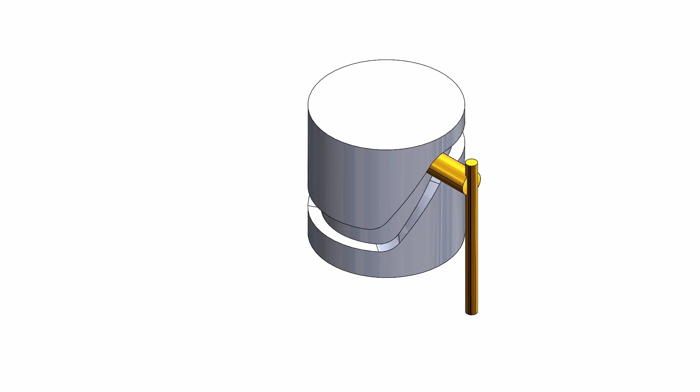Namaste guys, in this video we are going to learn how to make this cam mechanism in Solidworks.

So let's start. Go to the assembly, click on new part. Select the front plane, press Ctrl plus 8 to bring it into view. Click here, click on convert entities, and draw the convert entity as I'm showing.

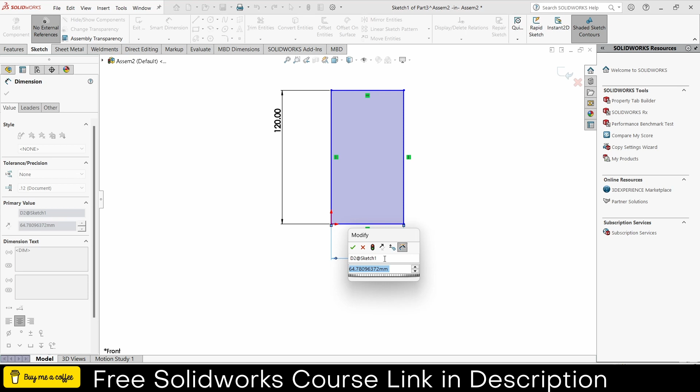Give it a height as per your requirement, 120, 40. Go to the features, revolve boss/base, select this line, click OK.

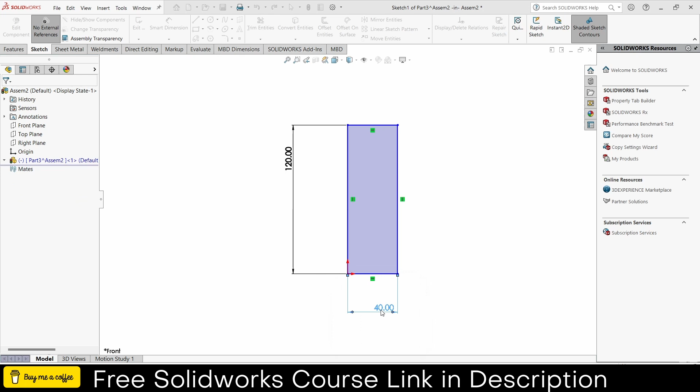Let's make it a little bit wider. Let's make it 60. Okay, this looks fine to me.

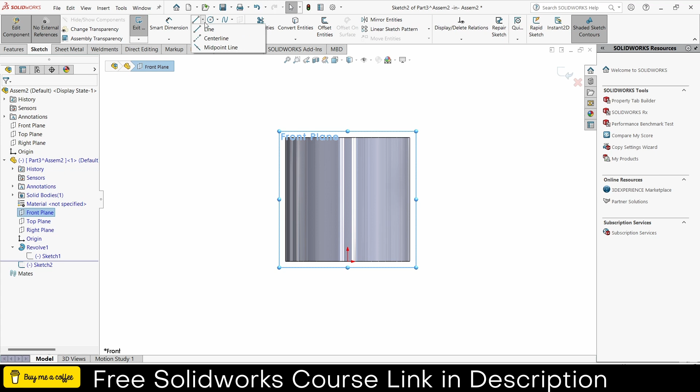Now after that, what I will do is select the front plane, click on sketch. I will draw a profile that basically cuts it out on this. So the first thing I have to do is go to center line and draw a center line.

So what will be its length? Its length will be 2 times pi into r. What is the value of r? 60. So this is what I got.

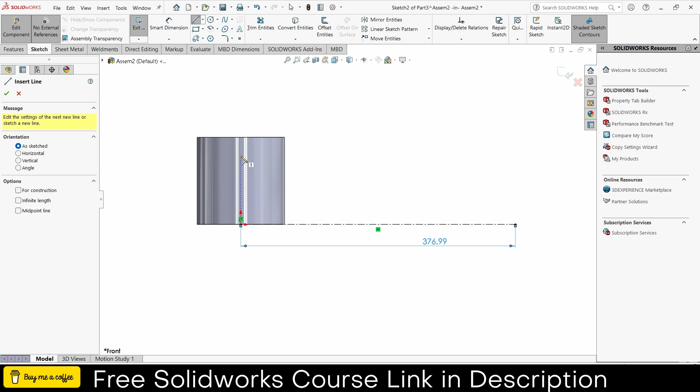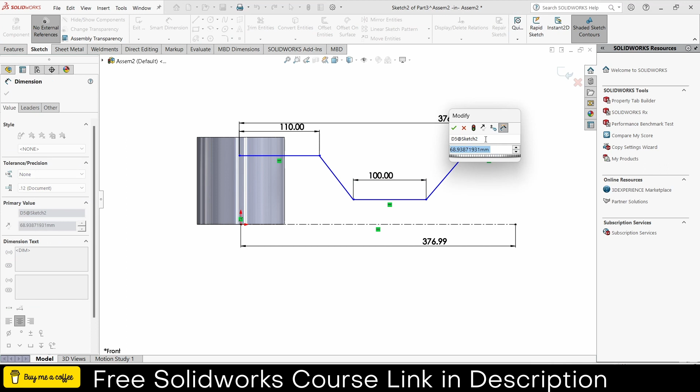Make sure that it has the same length as the below one, 376.99, and you can define these parameters as per your requirement: 110, 100, 70. Click OK.

Offset entities. Click base geometry, select the line. Bidirectional, cap ends, click on lines. Click OK.

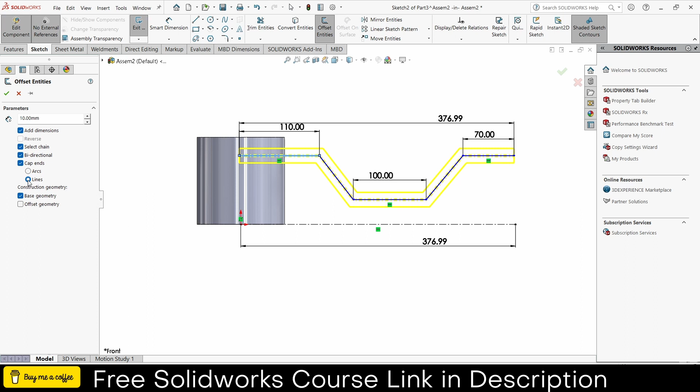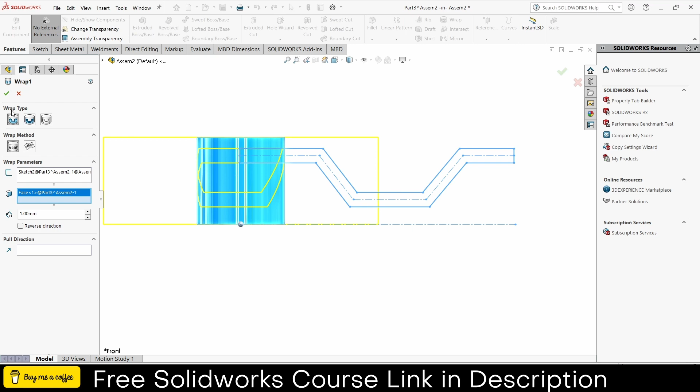Go to the features, exit the sketch mode. Click on the wrap command. Select the surface. Let's make it 10 mm.

Click OK. Currently it's moved outward, but I want it to be in the inward direction. So click here, click on reverse direction, and you can see different kinds of methods.

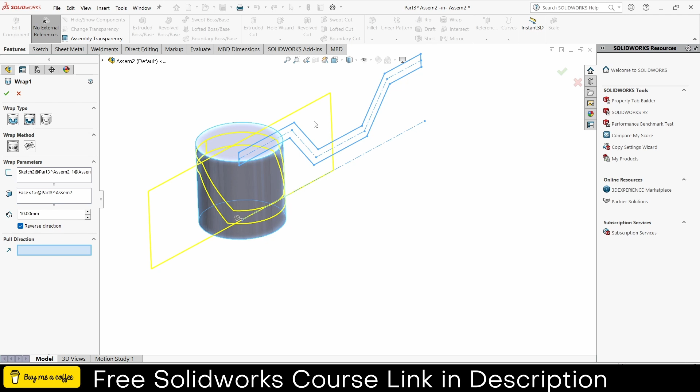So the first method is basically extrude out the material. The second is extrude cut. So click here, notice it's cut out. That is basically what I want.

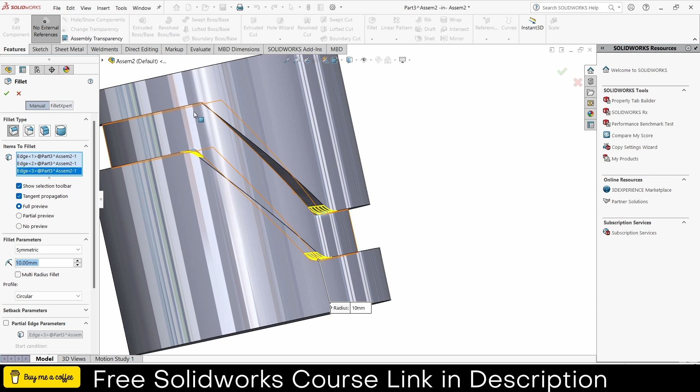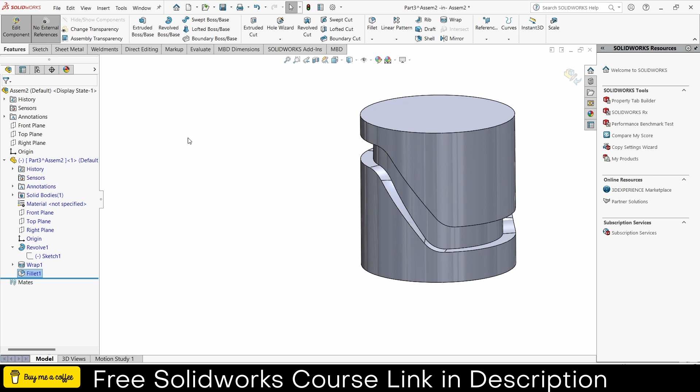Now what I can do is go to the fillet. I will add fillet here. Now I will draw a center line.

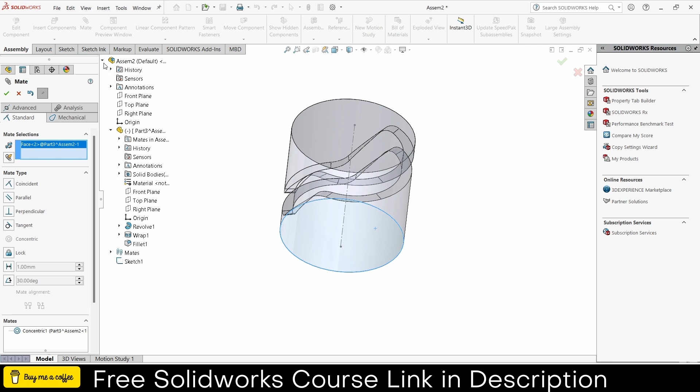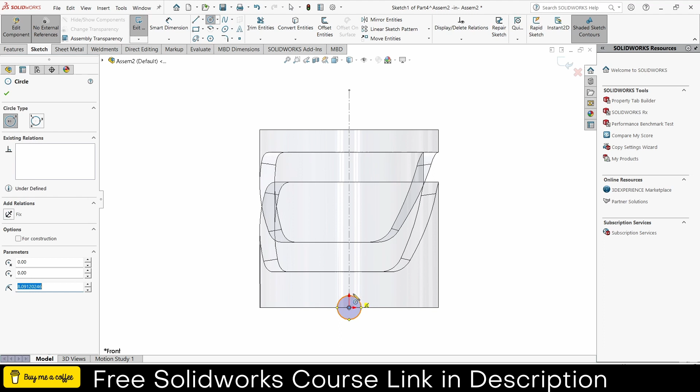Click here, new part, select the front plane. Make a circle of 9.5 mm. Extrude

up to 15 mm, or let's say 20 mm will be better. Click OK.

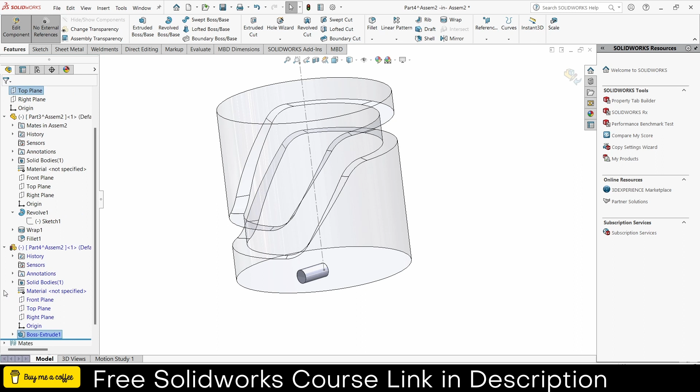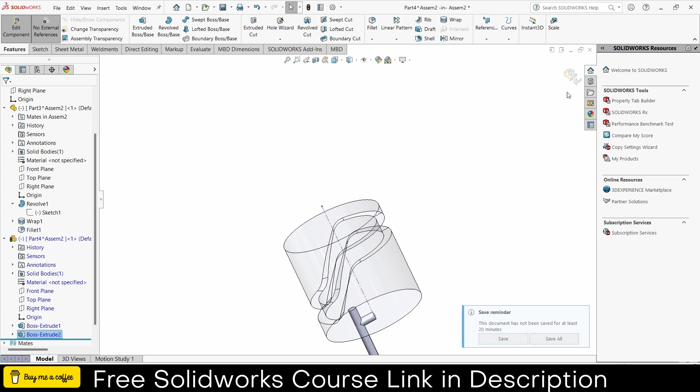Select the top plane, click on sketch. Draw a circle here. Extrude, click OK. Exit the assembly component mode.

Click on the front plane, click on sketch. Just so you know, I am drawing a sketch in assembly mode. Go here, draw a center line.

So what will be this length? Up to here will be 60. So let's make it 65. And this length can be as per your requirement, not mandatory.

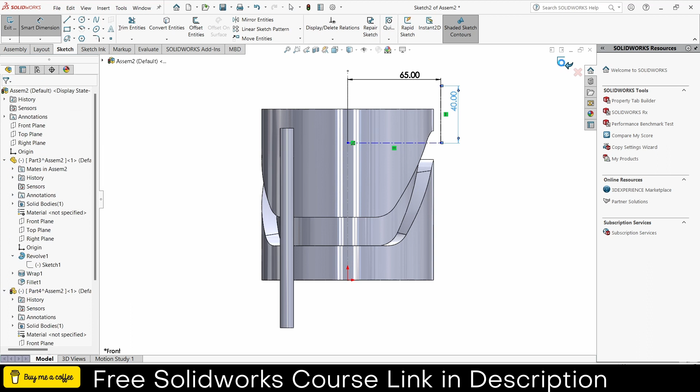Exit the edit component mode. Go to the mate. Select this face and this, make sure it's concentric. Click OK.

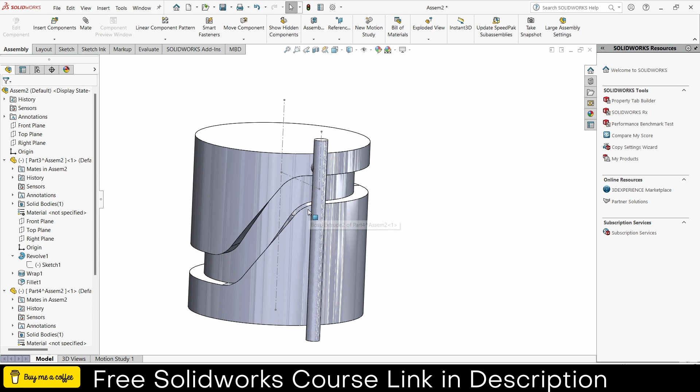Select this line. Notice it's quite small here to fit, so I will modify this part. Edit components.

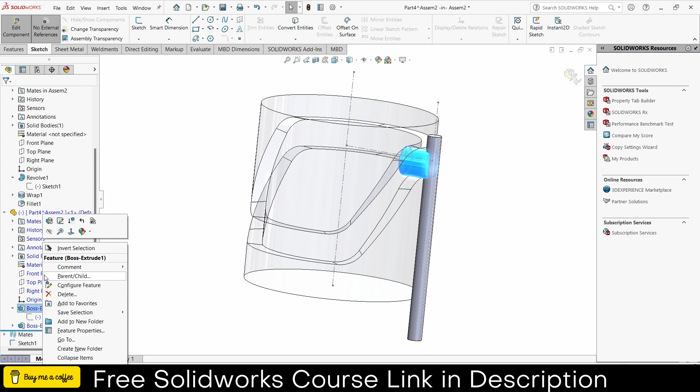19.5. Let's make it 40.

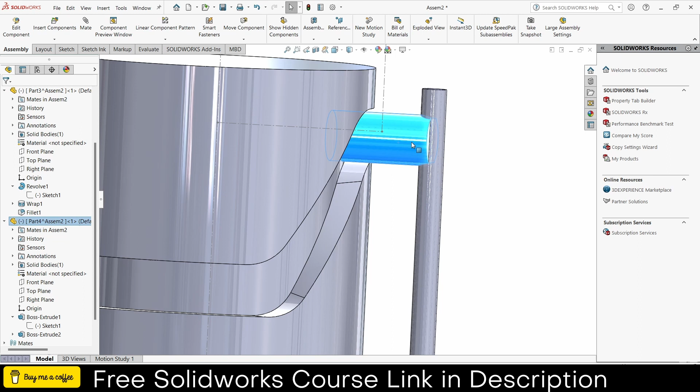Now select this plane. Click here, select this axis and select this line. Make sure it's parallel.

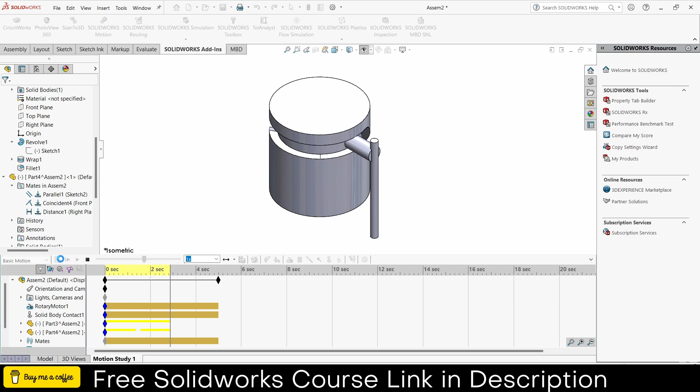So in that way we can create this mechanism.